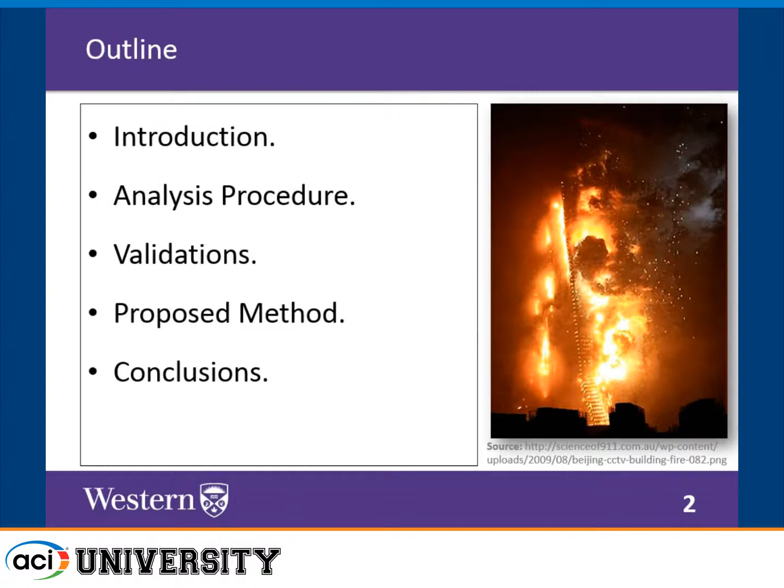The outline is: I'll start with a brief introduction, then talk about the analysis procedure, some validations, the proposed method for engineers or researchers who want to use it, and some conclusions and summary. In this presentation, I'm not going to go into details because there are lots of calculations and programming involved, so I'm just going to talk about the concept and how we are analyzing full frames using simplified methods.

Why do we need to study the performance of structures after fire? This is Dubai on New Year's Eve, and everyone was gathering there to celebrate next to Burj Khalifa, the highest tower in the world. Two hours before that, a fire happened in the Address Downtown Hotel, which is one of the most prestigious hotels there as well. They have state-of-the-art technology for preventing and extinguishing fire, but they couldn't stop it with all of the technology.

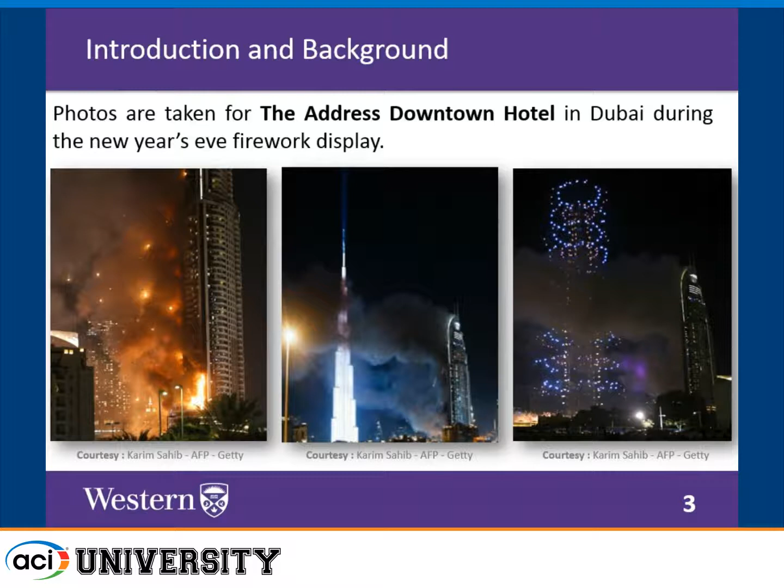So the fire kept going for hours. The fireworks started as well, so half of the people were watching the fire, half were watching the fireworks. Fortunately, there were no casualties, but we need something to assess the performance of this tower after the fire. So we intervened - not for that specific case, but we can use our method for such situations.

So our main objectives are to propose simplified procedures to determine the maximum temperature distribution after cooling, after going back to ambient temperature, and to investigate the stress redistribution that takes place in reinforced concrete frames after the fire, and to evaluate the residual capacity, stiffness, and deformations in all reinforced concrete members that were exposed to fire.

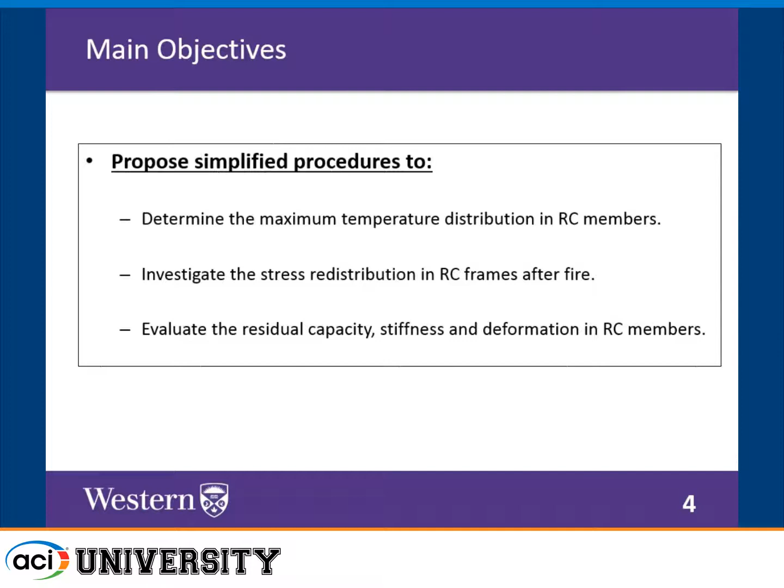So the main assumptions are: we use ASTM for now because it's the basis we are developing our procedure on, and maybe later we'll extend it to consider natural fire. During the heating phase, we consider ASTM E119, but for the cooling phase there is nothing in ASTM, so we consider ISO 834, which describes a gradual cooling period.

We did the heat transfer analysis using the finite difference method, and we considered that the thermal properties of concrete are irreversible. So once we reach the maximum temperature, they will be fixed because they change with temperature, and they remain fixed throughout the cooling phase.

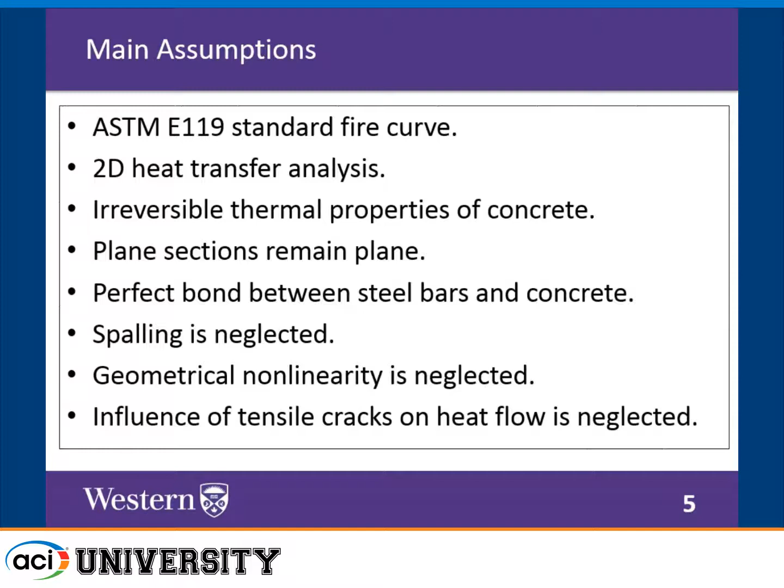Plane sections remain plane up to temperatures of 1,200 degrees centigrade, and this was validated by El-Fitiany and Dr. Youssef as well. Perfect bond between steel bars and concrete is also assumed. Spalling is neglected, so basically we are mainly considering normal weight concrete in typical applications. Geometrical nonlinearity is neglected, so buckling of columns is ignored or things related to that. Influence of tensile cracks on heat flow is neglected, so if you have some cracks, we assume that the concrete cover is still valid.

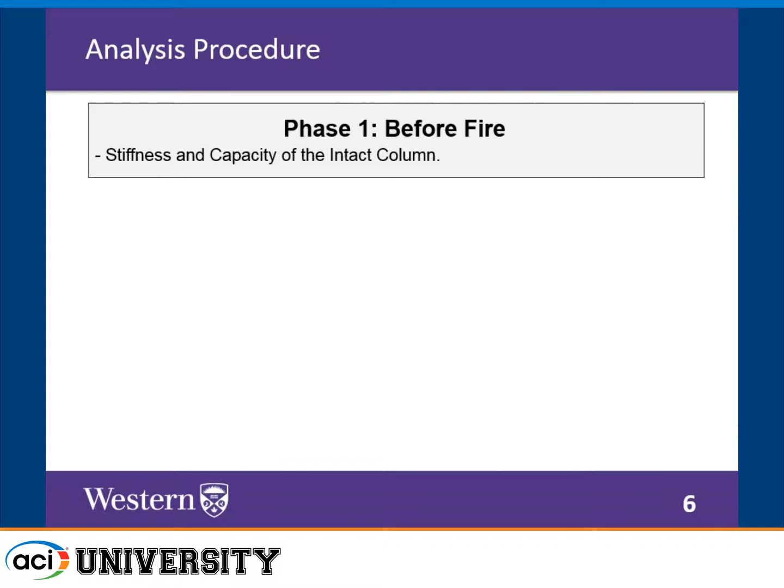So the analysis procedure encompasses three phases. In the first one, we analyze the structural member before fire to determine its stiffness and capacity, and this is like a basis to compare the residual properties to the actual properties of the intact member.

And then during fire, we need to consider the interaction between load and temperature at each time step - we'll go through that in detail later. In this case, we need to capture the maximum temperature reached, the load level caused by restraining thermal expansion if there are restraints in the building, and to check if failure occurs.

If the member didn't fail, then we'll go to the next step, which is studying it after the fire, to determine the residual properties and the residual deformations.

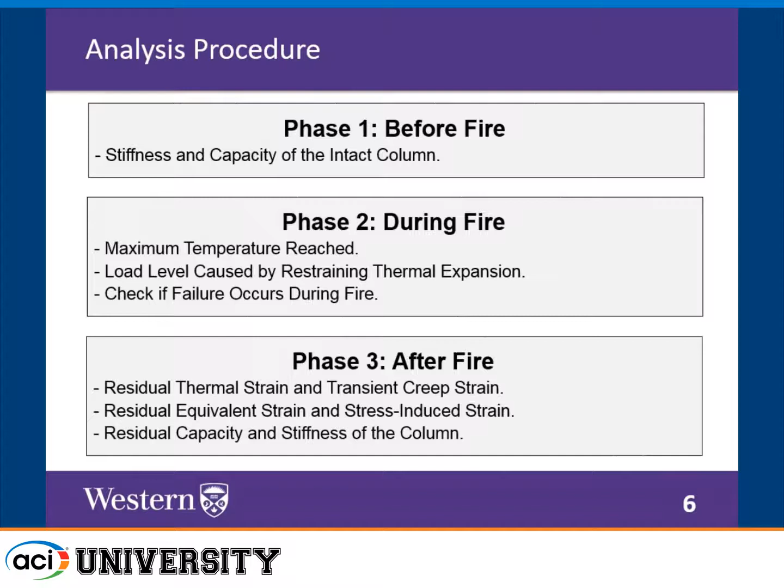So this is a typical concrete section. We use the finite difference method for thermal analysis. Firstly, we divide the section into a finite number of mesh elements, and we subject the member to fire from either 3 sides, 4 sides, wherever we want. Then we apply the finite difference method, and we can plot the contour lines.

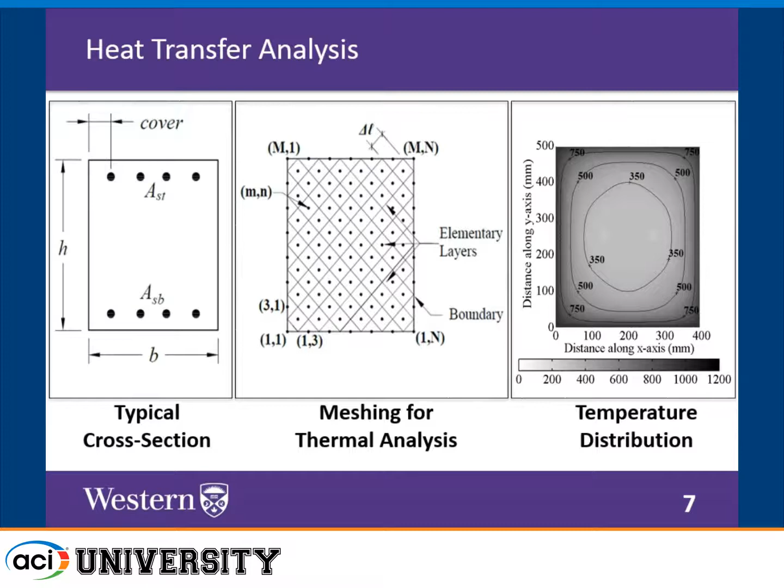From there, we can take the average for each layer, and we consider that this layer has a certain temperature for concrete. But for steel bars, we take the exact temperature at the exact element where the steel bar is located.

There are many methods in literature right now that describe the actual temperature distribution in concrete beams or columns after fire, like Wickstrom or Gao. There are many methods, but they describe these temperature distributions at the end of the heating phase.

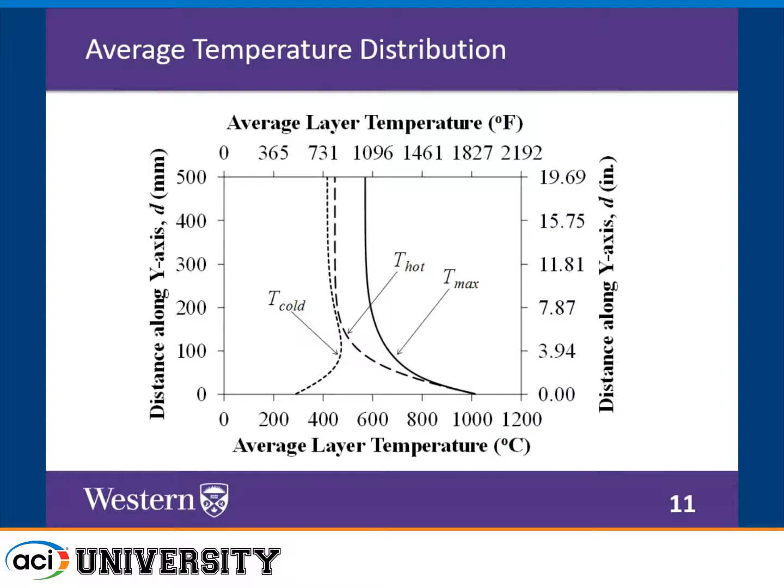So we proposed a method based on an extensive parametric study to convert the temperature at the end of the heating phase to the maximum temperature reached after cooling. Because during cooling, temperature still increases inside the concrete as it transfers to both sides, to the atmosphere and to the core. So this is how we convert the section, the concrete layers.

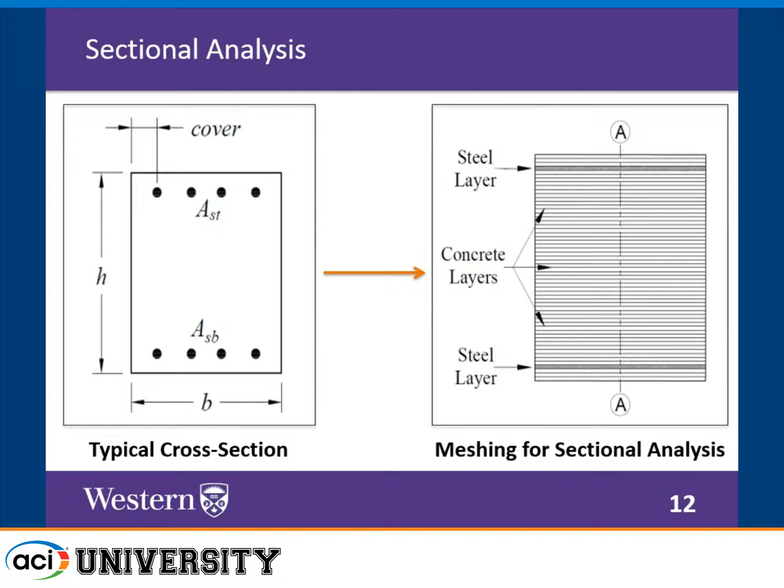We know the temperature in each layer, and the steel bars will be converted into steel layers. For the residual strains, if we have a column before fire and we heat it, it will expand. After fire, it will contract a little bit, but because of the permanent cracks that may take place between the aggregates and the cement paste, there will be residual expansion, and this is called the free thermal strain.

We modeled that based on the Eurocode model, and this is a typical thermal strain of an axially loaded column heated from four sides.

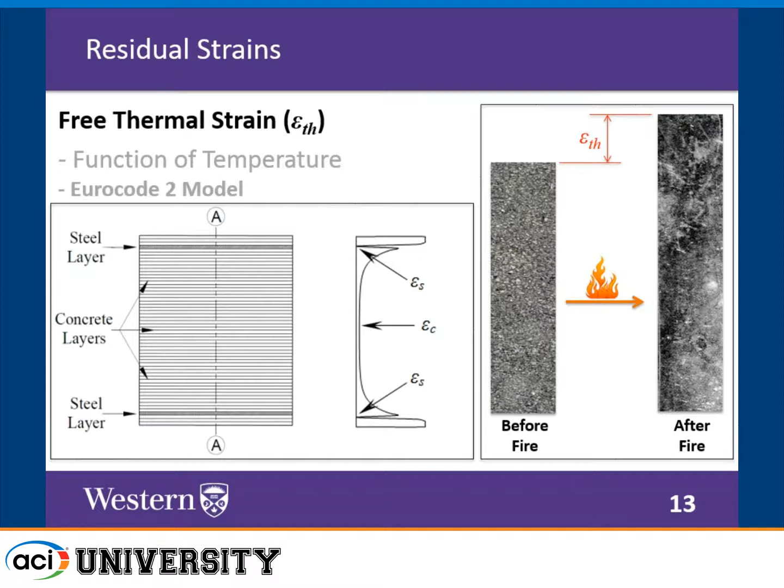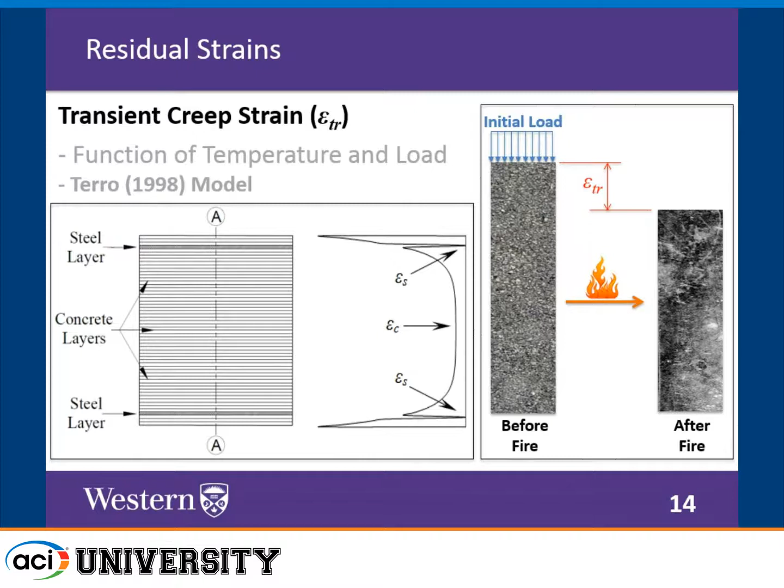But if the column is loaded, there is another term called the transient strain, where the column will experience something different. It will contract depending on the applied load and depending on the maximum temperature reached. So we considered the Terro model to describe that strain component after fire.

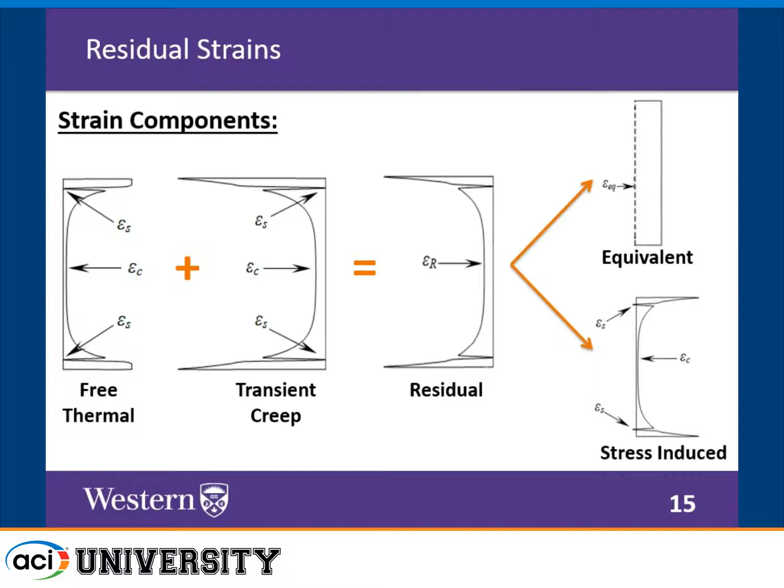If we combine the free thermal strain and the transient creep strain together, we will get what's called the residual strain after fire. This residual strain can be divided into two strain components: the equivalent strain, which is related to the actual deformation of the member, and stress-induced strain, which will maintain the equilibrium between the steel bars and the concrete.

So let's explain it more. This is the initial condition, and this is what the column tends to be after the fire. Steel bars tend to go back to their original positions because they are metal, and metals restore their initial length after cooling. Concrete tends to keep some deformation due to free thermal strain and the transient strain combinations.

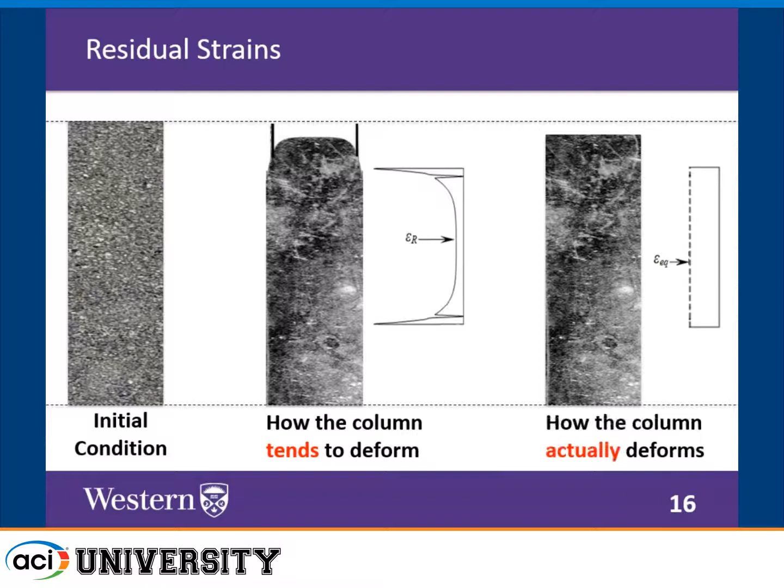However, what we see is something like that, because plane sections remain plane, and this is the uniform residual strain, and there are some residual stresses that keep this shape. So after fire, the columns or the beams or any other structures have some stresses inside.

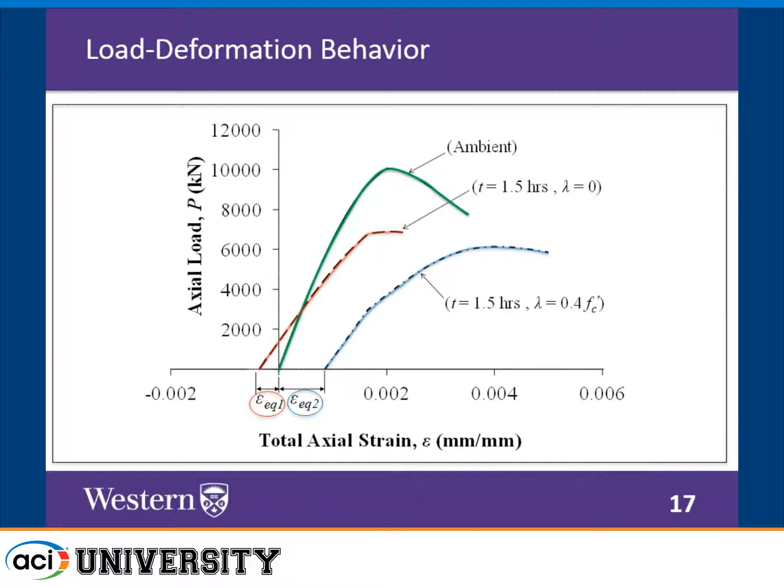So these equivalent strains are going to shift the load deflection curve after the fire, either to the expansion side if the column was not loaded before the fire, or to the contraction side if it was loaded before the fire, due to the effect of transient strains.

In our model, or in our methodology, we categorize the structural members in any building into four categories: unrestrained unloaded members, unrestrained and loaded members, restrained unloaded members, and restrained loaded members.

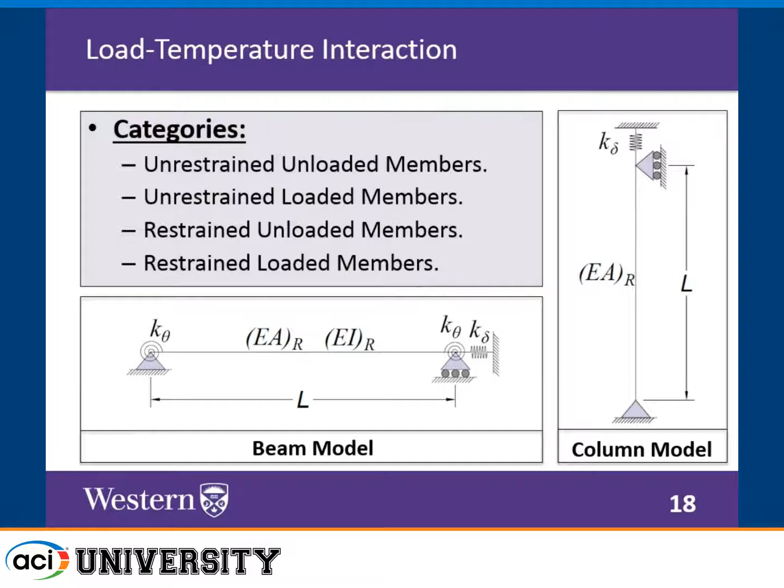So for each beam or each column, we can remove the actual joints and replace them with springs with either axial or rotational degrees of freedom, or stiffnesses. We can obtain the residual stiffness for each column or each beam after the fire from the calculations.

To explain that more, if the column or the beam is unloaded and then we applied a temperature of, let's say, 500 degrees and a load of 100 kilonewtons, we can do that by many ways: either apply the temperature first, then the load, or the load then the temperature, or do that in increments.

So if we apply the temperature first and then the load, we will reach the same stress and temperature state at the end. But according to the strains, we will have free thermal strain first, and then the influence of transient strain will take place. So we reach a total strain at that point.

However, if we apply the stress first and then the temperature, we will go in another path. So we will increase the mechanical strain first, and then we'll get some thermal strain, and the values are different because the member was heated after loading. As you can see, the total strains in both cases are different.

In usual cases, if we have restraint during fire, then we'll have something in between, because while the member is heated, it will push the joints and they will push back, so it will be subjected to more load. If it's subjected to more load, then transient strain will develop, and the transient strain tends to reduce the impact of fire, of the expansion.

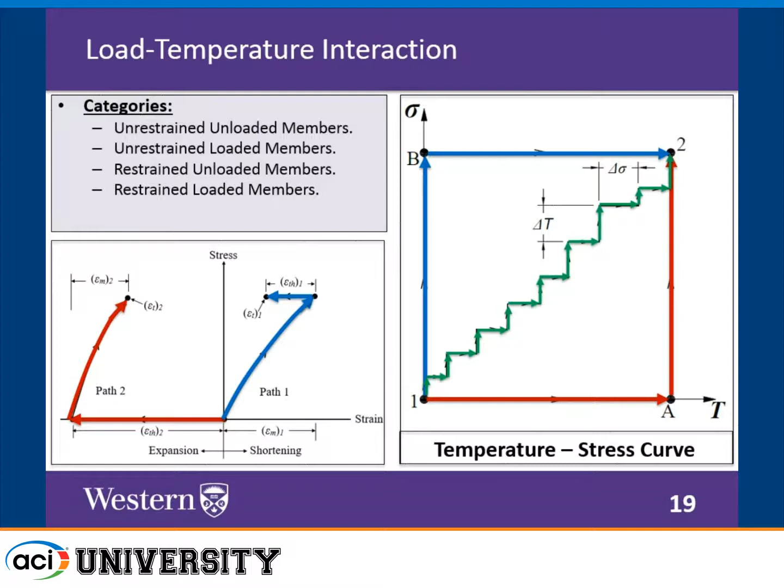So it's something that needs many iterations, and we did a code to do that. I don't have time to explain it in details now, but this is the concept.

For validation, I just used this one for now, but we had many others. This is an unrestrained column by Chen et al., 2009.

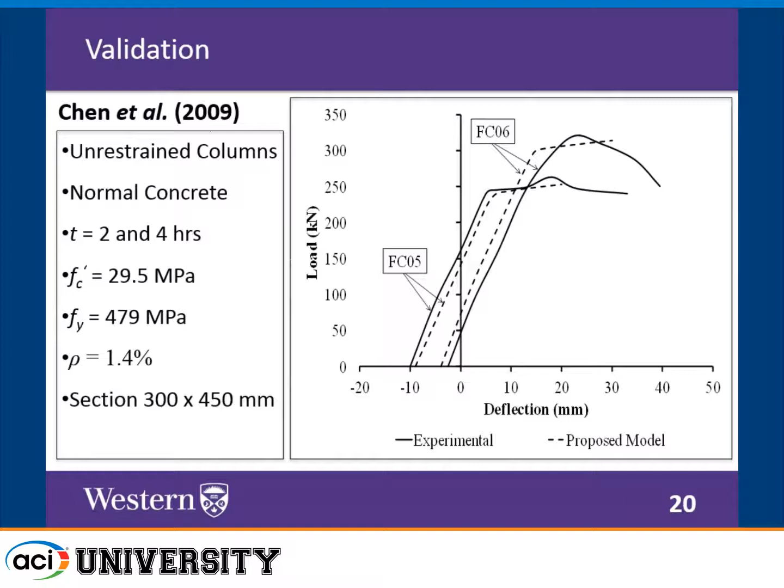They tested columns of normal concrete for 2 hours and 4 hours with an f'c of about 30, a yield of 480, and reinforcement ratio of 1.4%. As you can see, there is an expansion at the beginning, and after the columns were cooled down, the residual load deflection curve. Our model was capable of capturing the actual experimental results to a good degree, considering that this is fire.

After doing all the numerical analysis and validations, we proposed regression equations to determine the residual strength, residual stiffness, residual strains, and residual curvatures in all structural members, whether heated from 4 sides or 3 sides, for different fire durations, different mechanical properties for steel and concrete, and different restraining conditions, whether axial or rotational.

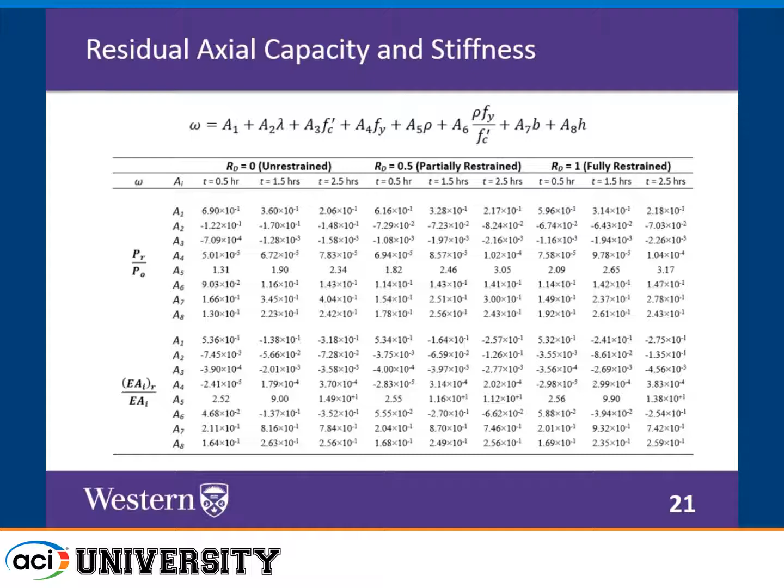So this is a simple equation. There are quadratic equations too, but this is one of them. We have the coefficients, we have the equation, we go to the table and get the residual strength, the residual stiffness, and so on.

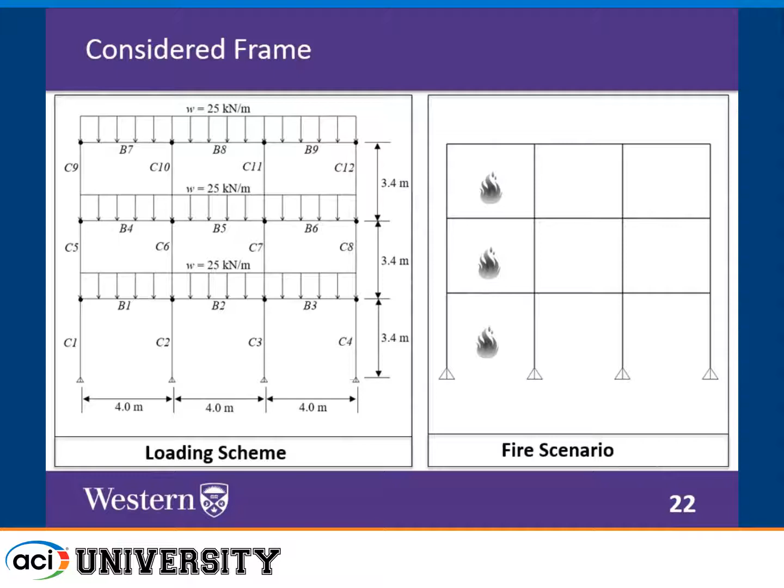Now, what we are expecting engineers to do is the important thing. Suppose we have a frame which is loaded, and fire happened according to some scenario, say at the facade of the building. We know the cross-sectional dimensions of each beam and column at sagging and hogging moments, the ones exposed to fire. So what we need first is to get the restraints acting on each member.

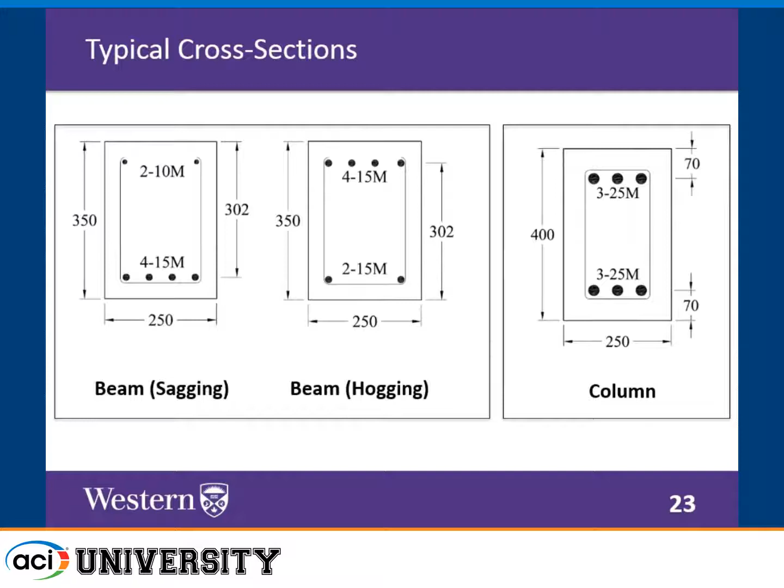So how do we do it? We isolate the column from the structural model, already built in SAP or ETABS or any finite element software. We apply a unit load, measure the corresponding deformation, and from there get the stiffness of that joint. Then we apply the same unit load at the other joint and get the corresponding stiffness.

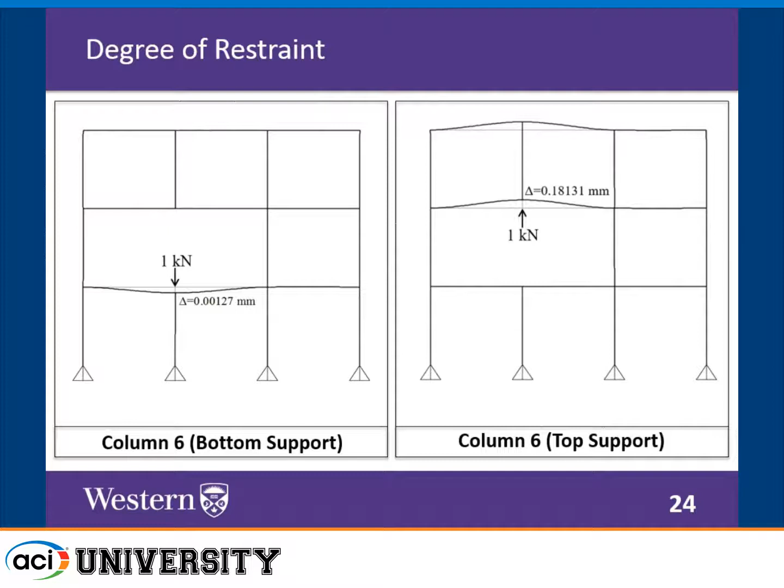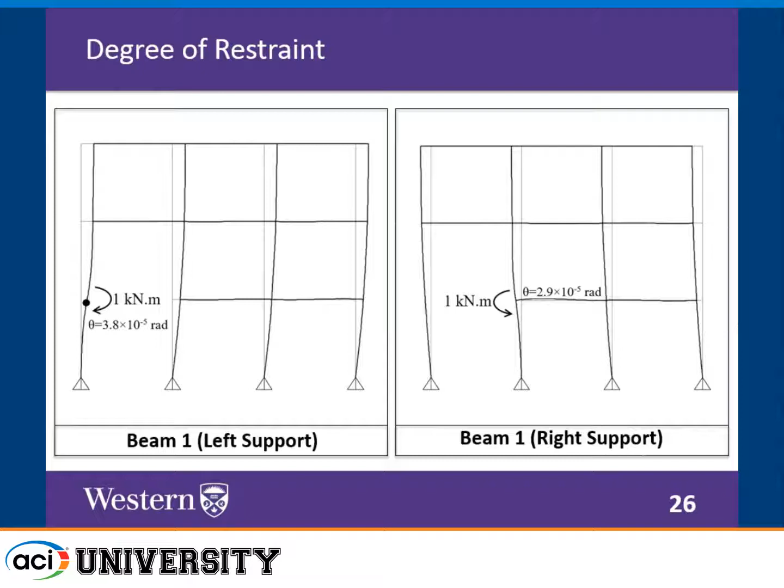We consider them as springs in series, and we can get the restraints acting on that member. Same thing for the beam: we apply a unit load at the left, then at the right, and take the equivalent restraint. Because beams are subjected to significant flexure, we also consider the flexural restraint in the same way.

So any structure exposed to fire from 3 sides or 4 sides, we know how much it was restrained, we know its mechanical properties, we go through the equations, get the reduction in stiffness, and put it into the finite element software. The other members were not changed, so they stayed the same. Then we run the analysis again.

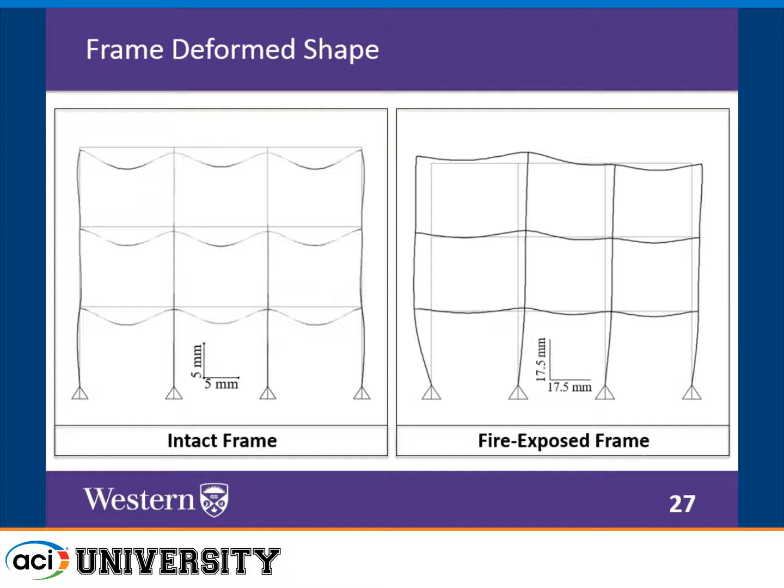For the residual deformations, we applied the residual strains or curvatures as either temperature load or temperature gradient, which is an input in SAP, for example. If we have an equivalent residual strain, we can use alpha, the coefficient of thermal expansion of concrete, to get the corresponding temperature, because strain equals alpha times delta T. So we put in delta T based on the strain we have, and similarly for the temperature.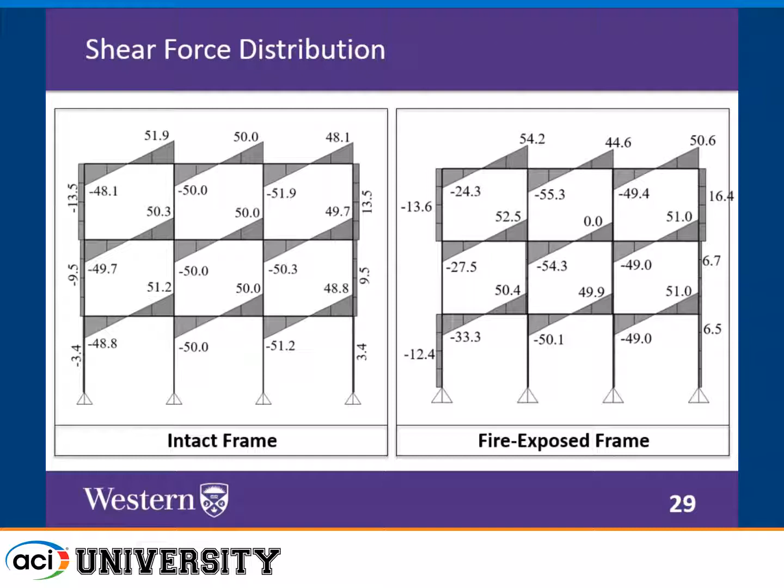I think engineers can just compare the values from here with the residual capacity they calculate from our proposed equations, because we provide them with the residual capacity of each member. So if the members pass that residual capacity, then they are okay and the structure will stay; otherwise, it may face some problems.

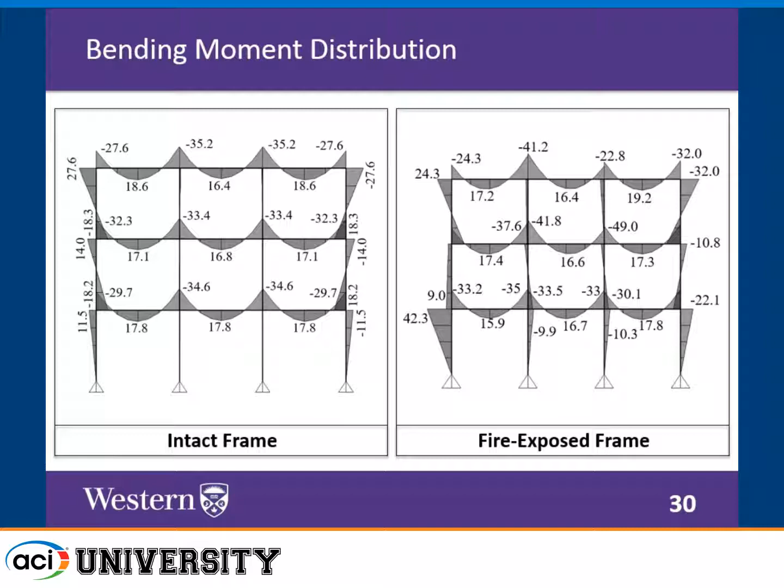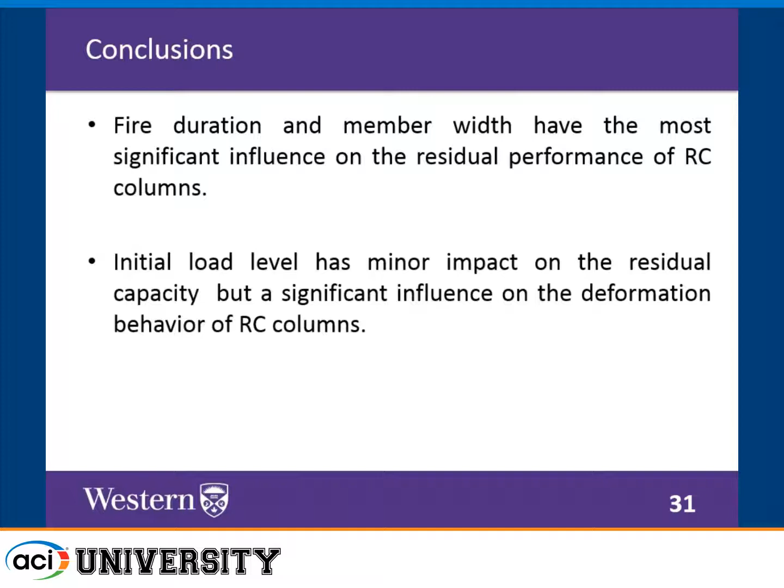In conclusion, we found that fire duration and member width have the most significant influence on the residual performance of columns, beams, and other structures. And we have developed a method to determine the residual performance of structural members after fire.